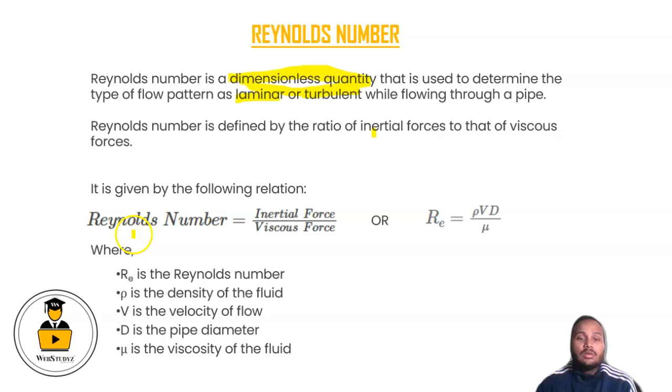So the relation of Reynolds number can be given, as the definition suggests, inertial force by viscous force, or we can write Re. Re is basically Reynolds number. It is equal to rho V d upon mu. So here rho is the fluid density, V is the velocity of flow, d is the pipe diameter, and mu is the fluid viscosity.

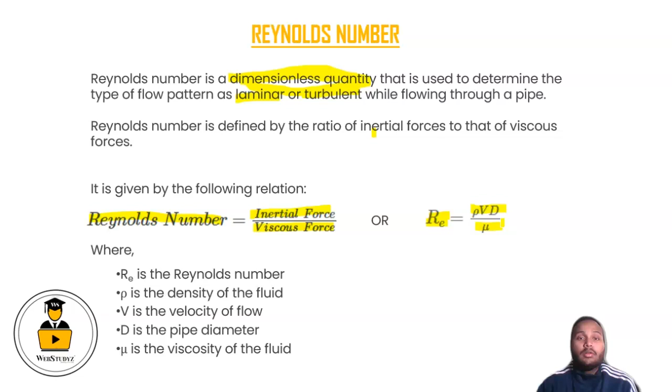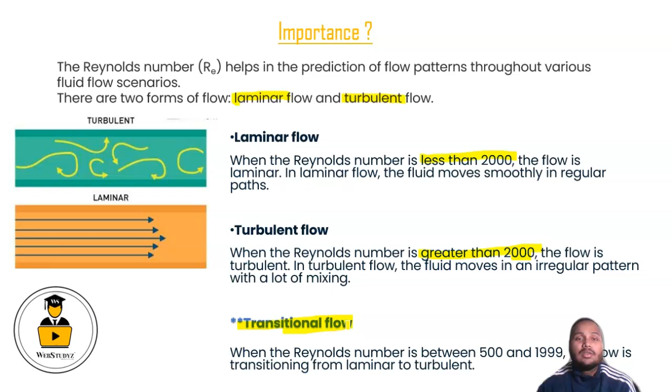So the condition of laminar flow is that when the Reynolds number is less than 2000, the flow is laminar. And if it is greater than 2000, then the flow is turbulent. One more thing we have in between laminar and turbulent flow, which is known as transitional flow. When Reynolds number is between 500 to 1999, the flow is basically transitioning from laminar to turbulent. It is not a type of flow, but it suggests the transition between laminar and turbulent flow.

Now let us understand the applications of Reynolds number and where it is applied in real life. The very first one is flow classification, to determine whether it is laminar, turbulent or transitional flow, as we discussed. Another one is heat and mass transfer. It influences the transfer rate. Turbulent flows enhance mixing and also improve the efficiency in heat exchangers and reactors.

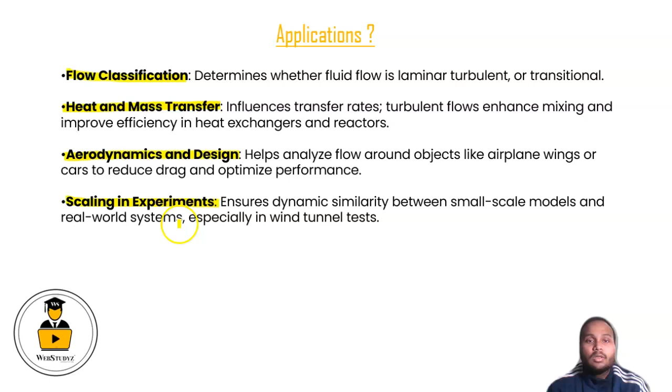Thirdly, it is used in aerodynamics and design. It helps to study flow around objects like airplane wings or cars, so as to reduce the drag and optimize their performance. And lastly, scaling in experiments. It ensures dynamic similarity between small scale models and real world systems, like in wind tunnel tests. So now let us solve questions based on Reynolds number.

It is said that water from a pipe is coming at a rate of 100 liters per minute. If the radius of the pipe is 5 centimeters, the Reynolds number for the flow is of the order? Firstly, density of water and coefficient of viscosity of water are given here. So we can write the Reynolds number formula: Re is equal to rho V d by mu. So what data do we have? We have rho equal to 1000 kg per meter cube.

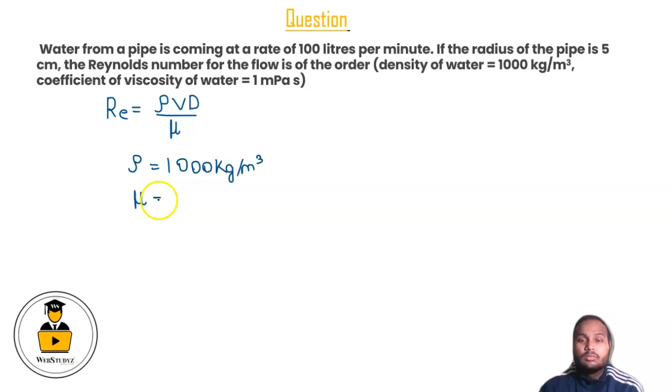Then we have the value of mu. This is 1 millipascal second, which we can write as 10 power minus 3 pascal seconds in SI units. Apart from that, here we don't have the velocity, we have the volume velocity. Let's call it V dash. So volume velocity is basically V into A, area.

So here we have the volume velocity as 100 liters per minute. So 100 is equal to V into area of the pipe. Here area is cross sectional area, so we can write pi into r square. What is r here? r is 5, so r square is 25, and converting to meters we can write it. So from here our velocity will be 0.21 meter per second. Now we have got all the values.

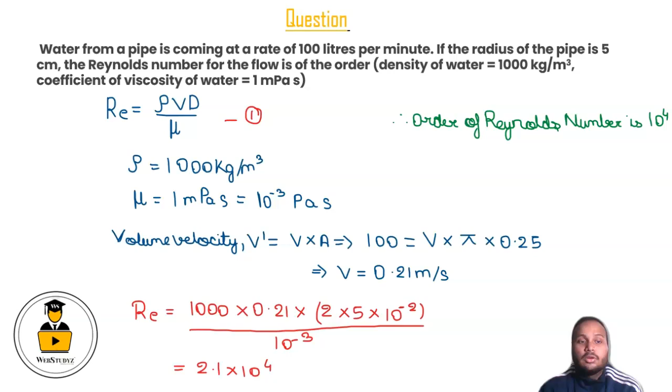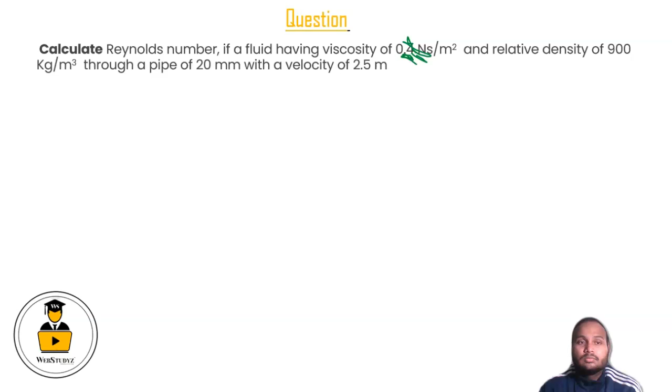Here we need to calculate Reynolds number if a fluid has viscosity 0.4 newton second per meter square and density of 900 kg per meter cube, through a pipe of 20 mm, and velocity is 2.5 meter per second. Therefore, viscosity of the fluid is 0.4 newton second per meter square. We have been given density of the fluid, that is 900 kg per meter cube. And the diameter D is 20 mm. If we multiply this by 10 to the power minus 3, we get it in meters.

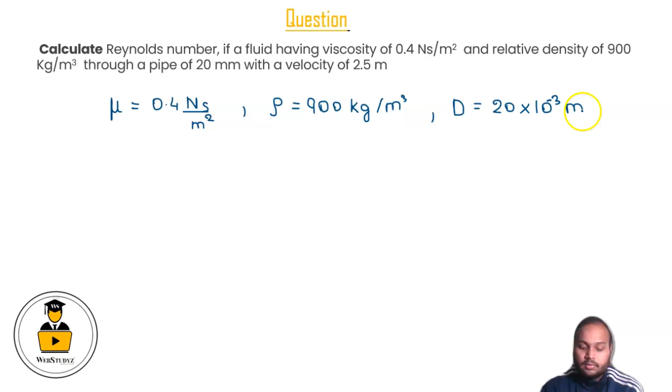Now we can write our Reynolds number. The formula is rho v d by mu. The velocity was 2.5 meter per second. So we can substitute the values. We get 900 into 2.5 into diameter, that is 20 into 10 to the power minus 3, divided by 0.4. If we multiply and solve all these, we get 112.5, and there will be no units since Reynolds number is a dimensionless quantity.

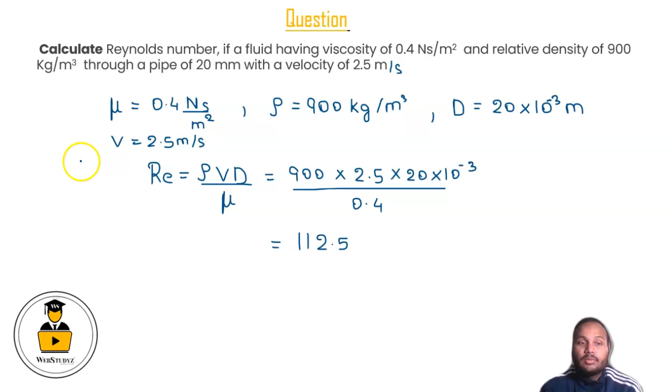So I hope you understood the concept as well as both of the questions.